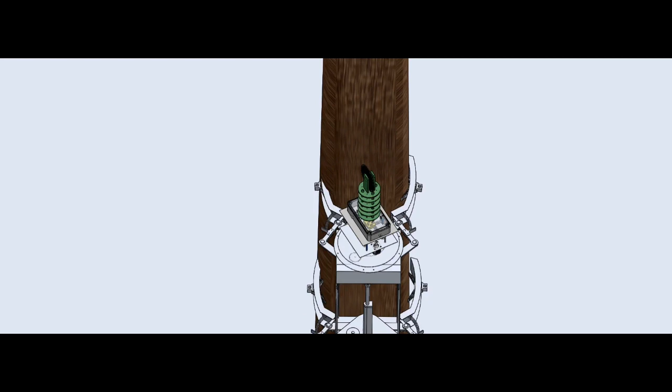For having a grip on the tree, we are using 4-bar mechanisms for our links to grab the tree parallelly as seen. The movement of the link is controlled by the worm and worm wheel gears, where the worm gear is directly attached to the motor of required torque to hold the weight of the body on the tree. 4 such 4-bars are used in total in the system for helping the bot to perform a caterpillar-like movement.

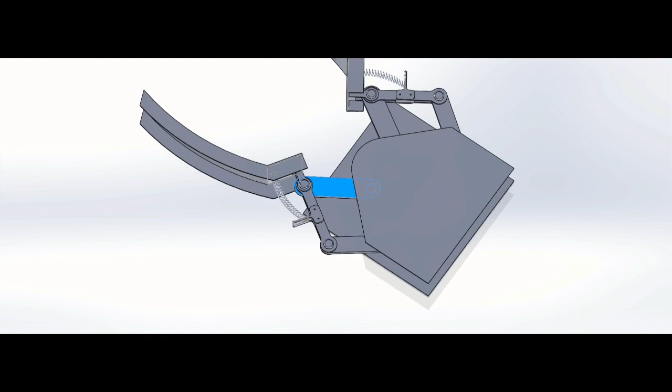The spring attached at the outermost link helps to attain a better grip at the surface of the tree for variable diameter. Independent motors for left and right grippers help to have grip on a surface which is not symmetrical and perfectly circular in shape. The curved shape of the link helps to have more surface area in contact at a time for better traction.

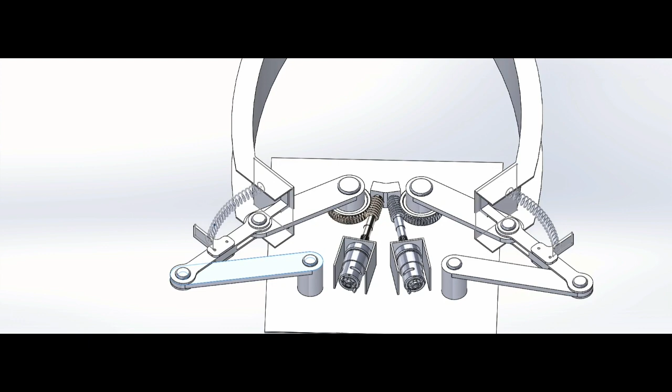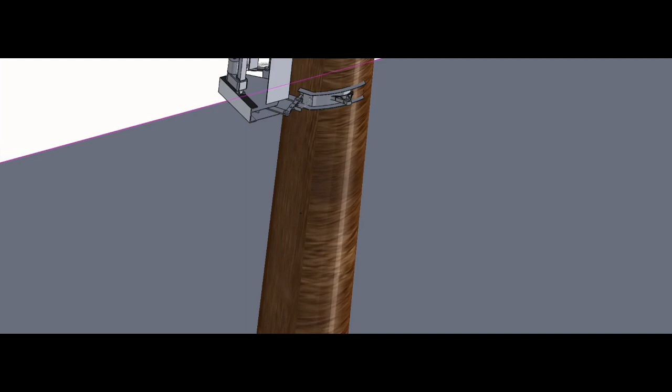Worm gear prevents the reverse motion of the link on its own, as one of the characteristics of the worm gear is that the driver and driven gear remain the same and cannot be interchanged. Therefore, once the link is attached to the tree, it cannot get detached on its own, which eliminates the need for constant torque from the motor for continuous holding on the tree. Now Sumit will explain the locomotion of our robot.

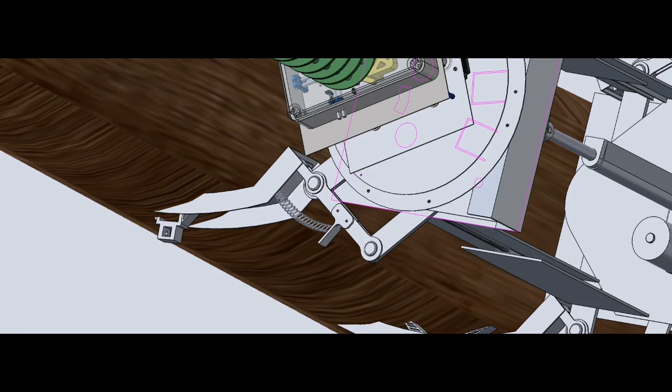For the locomotion of the robot, we have used a linear actuator of 5000 N and we have designed a mechanism for the straight upward movement of the robot. For that, we have provided 2 guides on the left and right of the linear actuator, and for smooth movement in the guides, we have installed sliding channels.

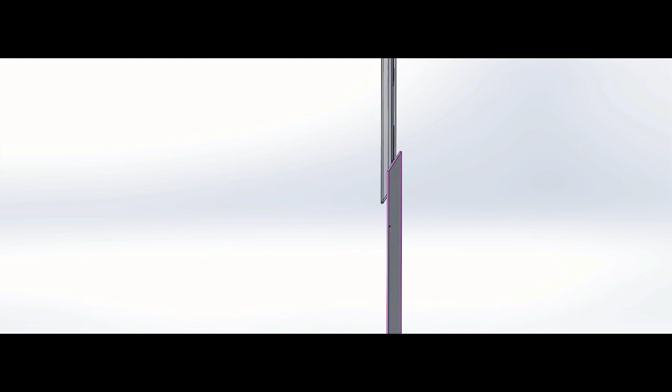Our guiding mechanism is inspired by a matchbox and we have used the same principle of sliding as in the matchbox. The sliding channels themselves set a limit for the guide so that it does not go beyond the required stretch, and in this way we have designed the locomotion for the robot, which we call a spine. Thank you.

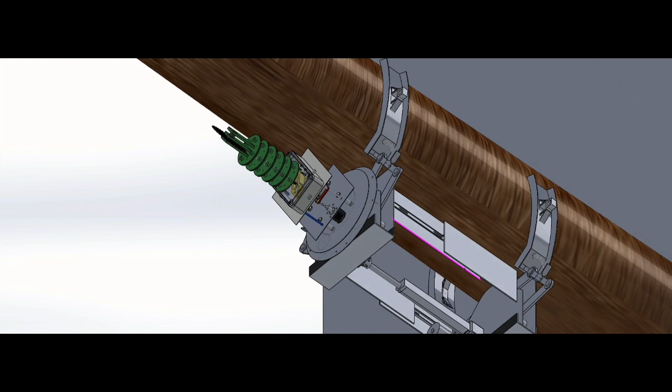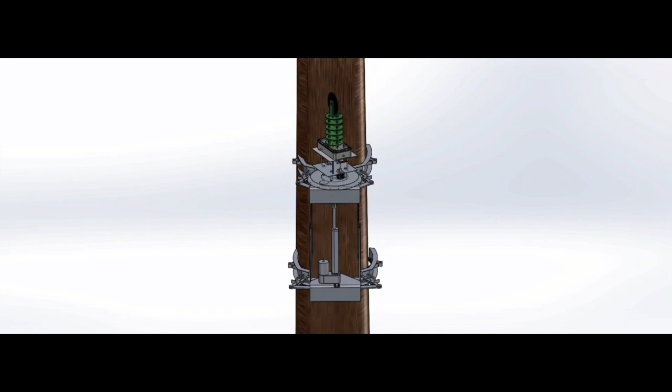For coconut cutting, we have used a mechanism from a new age sector of robotics known as soft robotics. The mechanism is termed a continuum arm. In comparison with traditional arms having solid links, a continuum structure is able to easily adapt to an unstructured environment. Despite its advantages, wire-driven mechanisms have a serious problem with tension, such as tension failure while pulling and pushing. Therefore, we propose a discrete continuum arm with a pre-tension mechanism that prevents tension failure or over-tension problems.

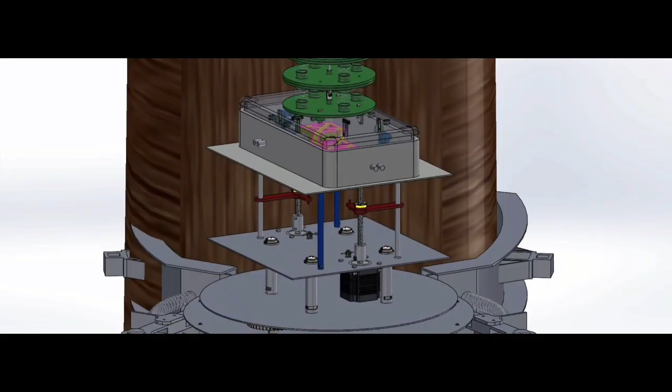To understand this arm, think of a person flying a kite. If one person does both things, that is maintaining tension in the string and also slowly loosening the string to maintain its effective length, it will be a very difficult situation to handle. That's why if 2 persons do the same job, it becomes easy. We have applied the same principle. Here our arm is basically divided into 4 segments.

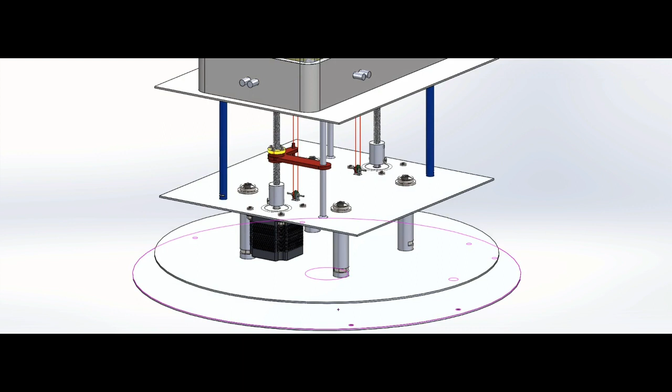First, the rolling motion of the entire setup, which is achieved by a simple motor and gear setup, upon which there is the actuation mechanism, the second one. Here, the speciality of this mechanism is that we are using only one motor to actuate 2 directions with a single string. This effectively reduces the amount of power and also the number of motors used.

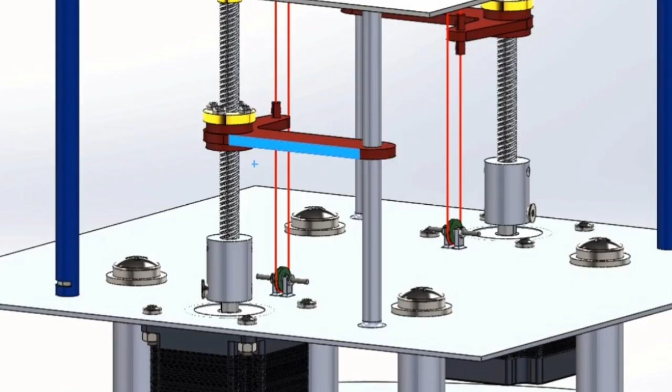As you can see, we have used 2 lead screws through which a customized 3D printed housing unit traverses up and down. As the motor rotates clockwise, it will go up, and if it rotates anti-clockwise, it will go down to achieve actuation of string tension.

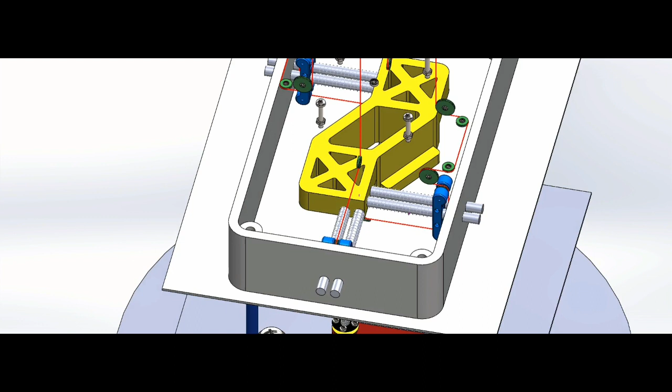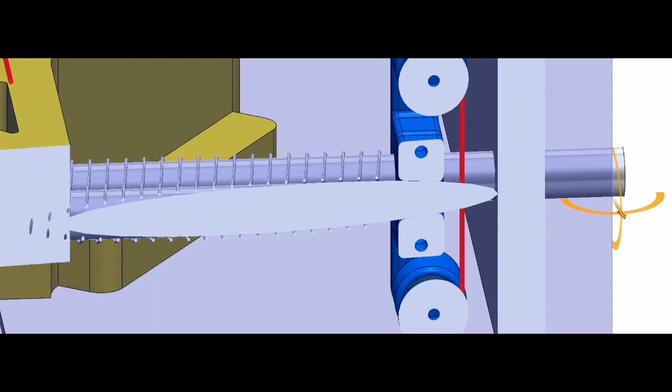As we move up, there is the third segment known as the pre-tension mechanism. This is devised after extensive research and a complex network of pulleys and strings is made. As you can see, 4 blue holding brackets, each containing 2 pulleys, provide a constant tension force with the help of springs. The force function of the tension springs is carefully calculated in order to achieve such tension. All of this is cased under a 3D printed custom housing to protect it from the outside environment.

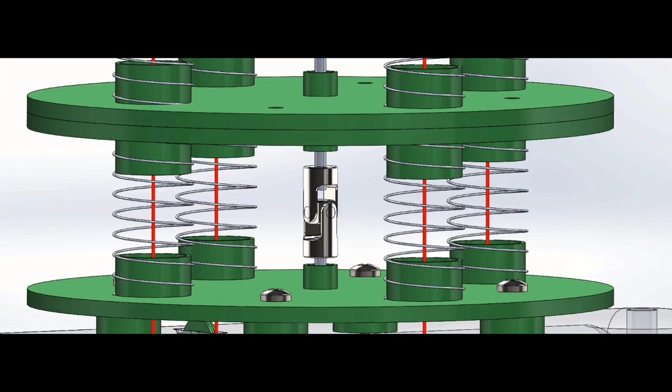As we go up further, there is the body of the continuum arm, which contains several spacer discs connected through compression springs, so they can adjust to their natural position. Each spacer disc is connected with the help of a universal joint and 2 small instrument ball bearings. As there are 2 degrees of freedom in each joint, the whole system will have 2n degrees of freedom, where n represents the number of joints used.

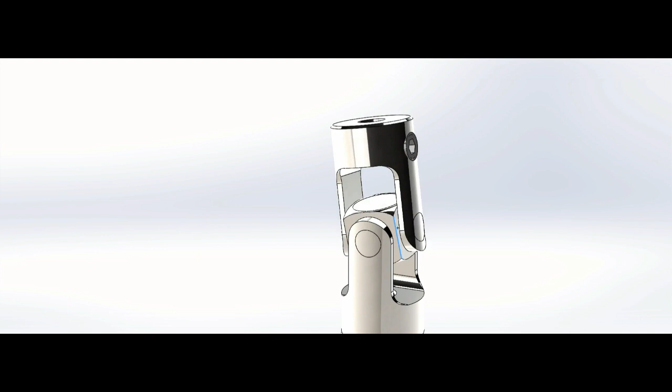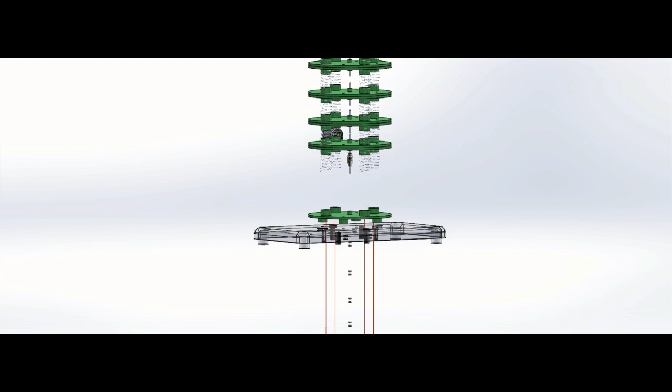And finally, for the end effector, a blade of 20 cm diameter is used, connected with a high RPM, low torque DC motor, so as to cut the coconuts efficiently. We have used this type of continuum arm because this arm can bend and twist to cut all the coconuts on the periphery of the stem easily with just one climb.

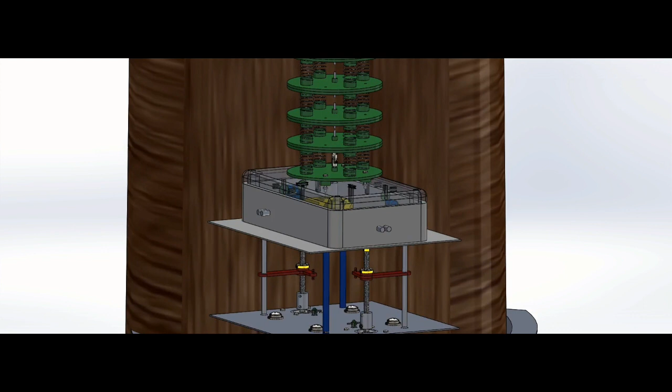As it is very high from the ground, moving the robot could be dangerous, but with this arm's flexibility, we can easily achieve that. Another speciality of this continuum arm is that from the CAD design, we propose that this whole continuum arm device will weigh under 5 kg. So as you can see, it is very lightweight and hence can be used in such high moving robots.